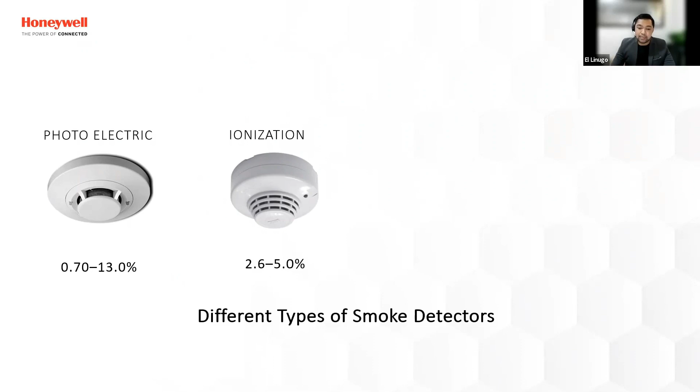And then last but not the least, of course, our projected beam. This is the most common, especially this type of technology used mainly for warehouses because of the high ceiling requirements and long hallways. So this is very much applicable. However, its detection is not similar to the photoelectric, which is enclosed in a single equipment. This is end-to-end, meaning from point A to point B of your warehouse, you can have detection.

So it detects the presence of smoke by attenuation of the light. Meaning our projected beam emits a certain frequency or light, and when the receiving end gets a lower light reading, there's a possibility that there's smoke. However, all of these three technologies I've mentioned earlier might be prone to false alarms, so they can encounter false alarm signals.

So with that regard, we have here what we call the aspirating smoke detector. This is actually one of the different types of smoke detectors we currently have in the Philippine market. Its main application is mostly for critical mission facilities, which covers all the livelihoods we might have now, ranging from cold storages, normal warehouses, or even data center facilities.

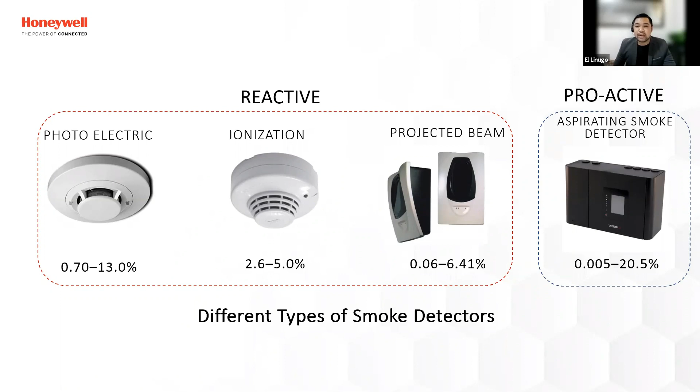So actually these three technologies I mentioned earlier, we call reactive, because they only wait for the smoke to rise up into the ceiling. Unlike the aspirating smoke detector, which I call proactive because it aspirates - the word itself implies it draws samples of air. I will be discussing this type of technology as we go along with the presentation.

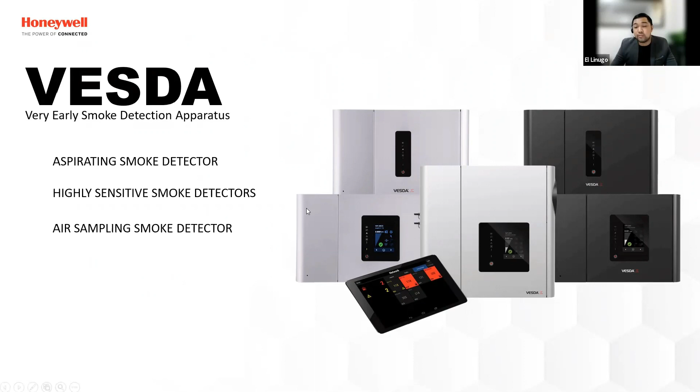So this aspirating smoke detection, as per Honeywell building technology, we have here the product called VESDA. VESDA is an acronym for Very Early Smoke Detection Apparatus, also known as aspirating smoke detector or highly sensitive smoke detector, HSSD, and air sampling smoke detector. This is the common terminology you may find when you search for it.

So where does it work and how does it work? Since VESDA aspirates air samples from a secured facility or the area we want to monitor, it acts in the incipient stage. As you know, the stages of fire are triggered from smoldering - whatever starts the fire, whether ignition or loose connectivity of circuits, it basically starts from a certain amount of fire or smoke.

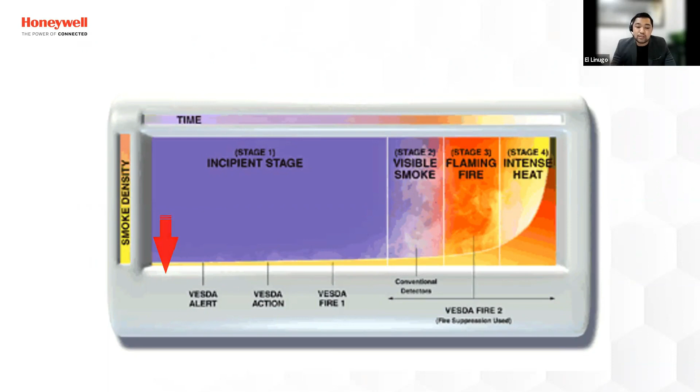We call it the incipient stage. With that, our VESDA actually will give you 3 alert triggers. Firstly, we have the VESDA alert, which will give you an instant notification that there is a presence of smoke, but it's not visible to the naked eye. Now, if that presence of smoke is elevated, meaning the smoke being received by our detector increases, it will level up into the VESDA action.

So that VESDA action can give you a notification or via relay a communication to trigger a certain siren or even strobe lights for audible and visual alarms that will notify the people within the facility. And then for the VESDA Fire 1, this can be integrated into the existing fire alarm control panel that we have in an area or facility.

And of course, we also have stage 2, stage 3, and stage 4 when we talk about the fire stages. Within stage 2, this is where our photoelectric sensors or projected beam will trigger. Basically, by this point, our equipment is already burning, our goods are already burning, and of course we do not want that as much as possible.

So we also have different existing technologies that can give us a notification when there's a certain fire. This is the fire detection stage. And then we have stage 4, which is intense heat, where the sprinklers will trigger.

And the common challenge when we talk about warehouses is that while sprinklers and other fire suppression systems are good to have, that is the last layer of security when we talk about fire safety. But remember, sprinklers or fire suppression systems are only dedicated to protect human lives.

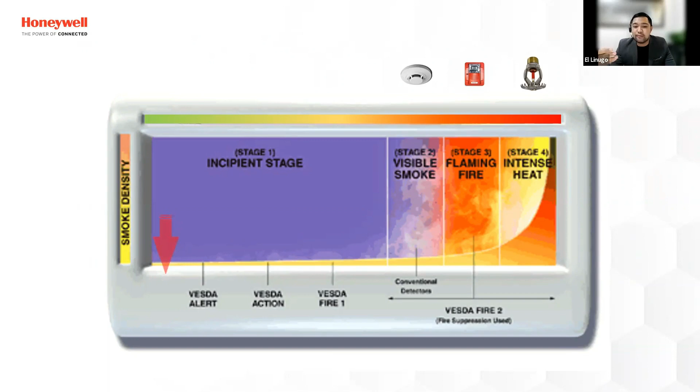Yes, so this product that you have, the VESDA from Honeywell, is your more proactive or unconventional solution that you feel is better for warehouses. Yeah, it is similar to putting another layer of security, and with that another layer of security, it will give you ample time to react whenever there's a certain notification of the first stages of fire, and of course, it will give you eventually the peace of mind.

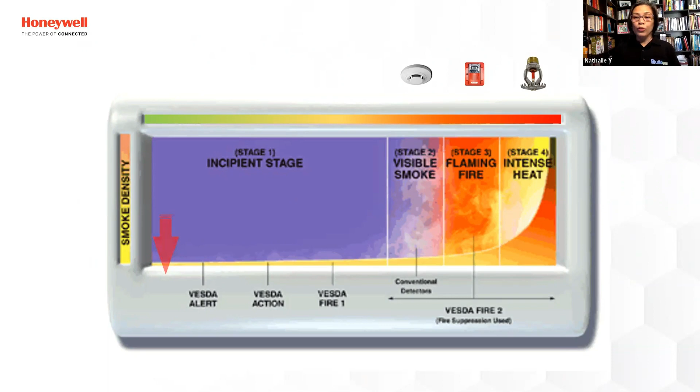So as we go along with the presentation, I would like to share some videos with you. This is an official video of VESDA on how it reacts in a certain high airflow environment. As we know, mission critical spaces such as warehouses where you put your inventory or stocks, the goods in our business, and even our data centers where we put all of our intellectual assets into the servers, we want to make sure that even the tiniest amount of smoke can still be detected. So how are we going to react? What will happen?

Hello, I'm Steve Joseph, Director of Market Development for Xtralis. I'm here today to demonstrate the performance of VESDA versus traditional spot type detection, specifically in mission critical spaces.

What we have here today is a demonstration kit intended to show the performance of VESDA against spot type detectors when subject to high air velocities. Mission critical spaces have various challenges associated with the environment, that being high air velocities intended to keep the equipment cool, and dilution that occurs from the results of the high air velocities.

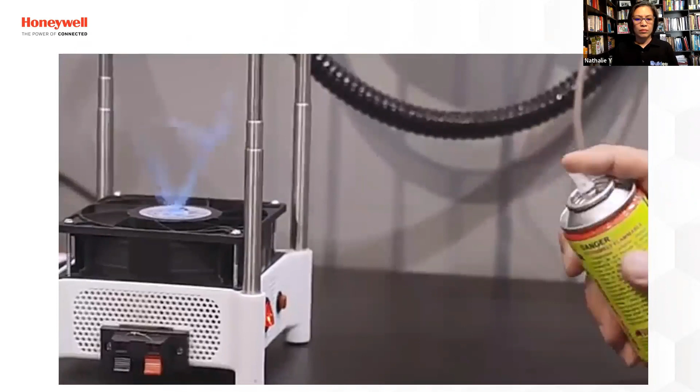The next test I'll perform is just how much smoke it takes to trip a traditional spot type detector in a high airflow environment. We'll generate continuous bursts of smoke. Already you see VESDA responding, while there's still no response from the spot type detector.

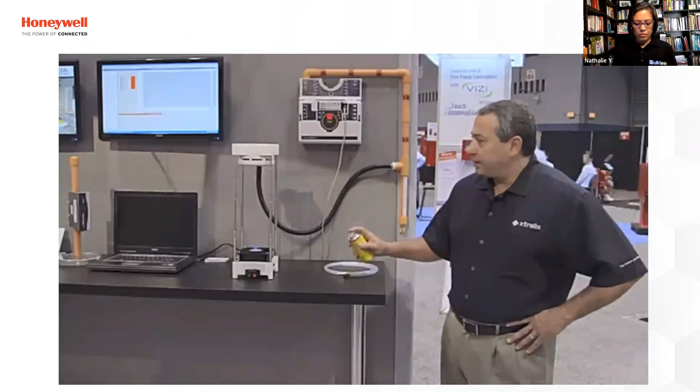We'll continue this until we actually get a response from the spot type detector. Still no response from the spot type detector. In the meantime, VESDA's going gangbusters. And at some point, we should have a response. And there you have it.

Now, the next thing I want to show is the convenience of VESDA in a mission-critical space. Mission-critical spaces have many obstructions, whether that be server racks, equipment, process piping, or cable trays, and trying to get to spot-type detectors on the ceiling of a mission-critical space can sometimes be challenging.

With the convenience of VESDA, we have the ability to pipe down to a low level, whereas a spot-type detector would require each and every point be accessed, whether it be a ladder, scaffolding, or special equipment to get to that detector. In this configuration, what we have is a special fitting that allows us to simply connect a port.

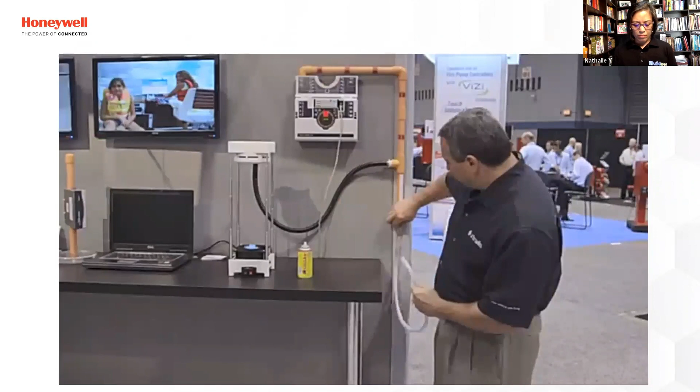Conduct a smoke transport time test, and as soon as you have a response from the detector, you've conducted your test of your system. You simply disconnect your point and move on to your next test point.

The fact is you can have as many as 20, 30, maybe 40 sampling points, or perhaps 60 sampling points, which is the equivalent of 60 spot type detectors. With one test, I've just tested my entire system versus having to get on a ladder or special scaffolding to get to each and every spot type detector to perform my annual test and inspection.

So in summary, for mission critical type spaces, VESDA provides the best return of investment, providing very early warning fire protection, ease of maintenance, test and inspection, and the ability to withstand the dynamics of the environment associated with mission critical spaces. Thank you.

So with that, that is the video explaining the high airflow environment for the VESDA. Okay, right. So, all right, so this will actually be short, no?

This is actually representing the VESDA in different applications that can be used in the air ducts, or maybe directly on the rack cabinets or under the raised flooring of your data centers.

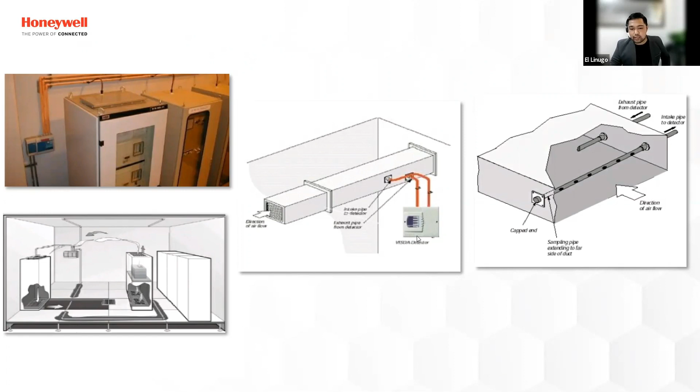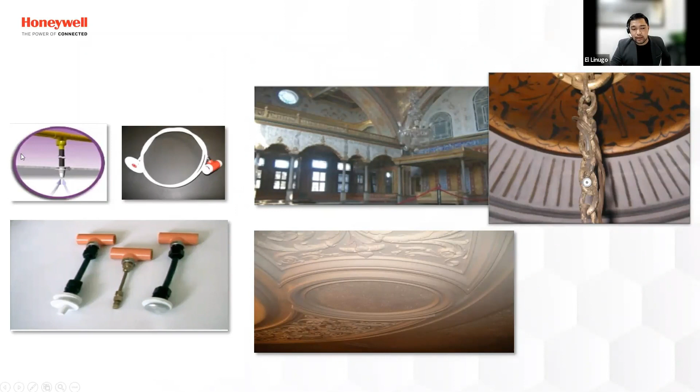So VESDA uses a flexible hose to do detection at a certain point, and it's even used in hotels, where it is very hidden. So that means it's not visible or noticeable. So this is one of the beauty of VESDA.

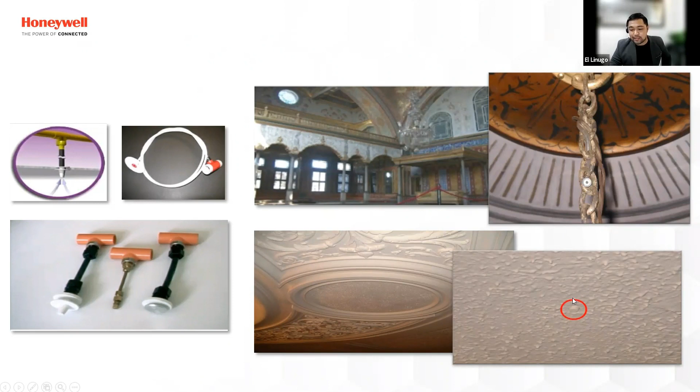And most probably you've already encountered this, or you might already have a certain warehouse with a high ceiling. The challenge with the normal spot type detector is that the smoke stratifies in the middle. However, with VESDA, we can actually pipe into the trusses of our building. Since it is an active smoke detector, it draws samples of air and creates airflow, so that means it won't stratify in the middle. Whereas with the conventional type, it needs to wait until the smoke is very strong or very thick in order to reach the ceiling.

So that's its main application, where it is so flexible that you can actually use it in most cases of the scenario. But here in the Philippines, we actually maximize these types of technology, especially for our critical mission facilities.

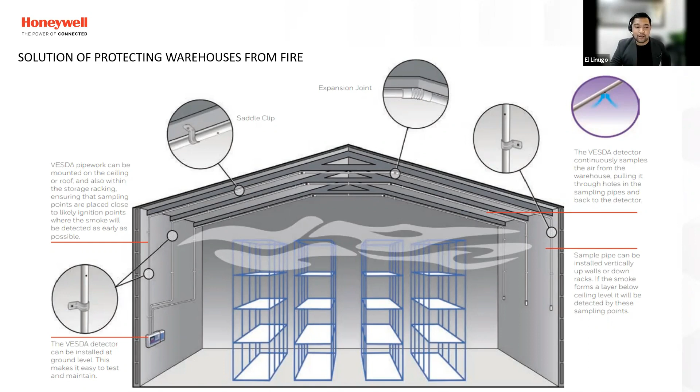I think, yeah, thank you so much, El, for the very thorough, detailed technical specifications of what this technology does. I think for the viewers, one important takeaway is you need this advanced technology to protect the product in the warehouse itself.

Unlike traditional or conventional fire detection technology, where humans are assumed to be in the facility, this warehouse technology is built on the strong presumption that there is nobody there, no human. Therefore it is critical that there's a way to detect these things, because what you're really protecting here is the asset that's in the warehouse.

So if this is a personal warehouse for your personal product, then it's protecting your products. Now, if your business is warehousing and a lot of companies are using your warehouse, then you're protecting the interest of the companies that have invested in your warehouse.

So I think for those who are watching, this is the significance and importance of this VESDA technology by Honeywell, because it will help you, it will give you the time you need to respond appropriately. Tama ba, El? Correct po.